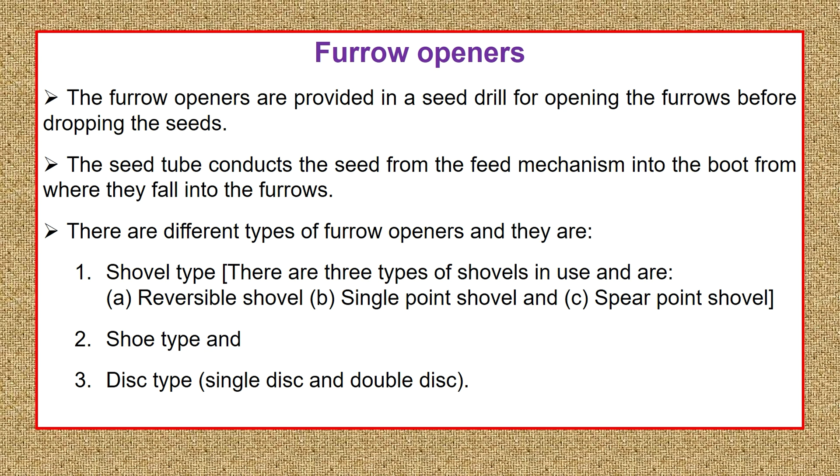This is how the shovel type furrow openers look. This type is best suited for land that is full of stones and root-infested from the previous crop. In such fields, shovel type furrow openers are recommended. These shovels are bolted into the tine or furrow opener shank at the lower point, so they can open the furrow to a desired depth and make the required width, into which the seed is dropped from the seed tube.

The one on the screen is equipped with reversible shovels. As I am marking it on the screen with the pen in red color, you can see the shovels placed on the shank or tine with the help of a nut and bolt mechanism. This one you are seeing here is the reversible shovel.

Why is it called a reversible shovel? It is also called a double point shovel because it has two working elements, two working points, sharp on both ends. We continue using it until one point becomes blunt due to wear and tear. Then we loosen the nut and bolt and reverse it, so the unused sharp point comes to the bottom and the blunt one goes to the top. This allows the shovel to be used for a long period until both sharp edges become blunt, which is why it is called the reversible shovel. In India, most seed drills are equipped with double point or reversible shovels.

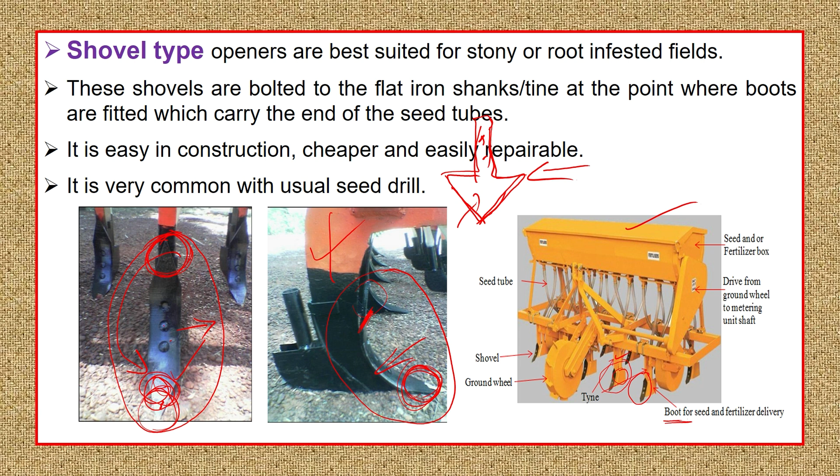Here you can see a regular seed cum fertilizer drill where the furrow shovels are attached into the shank or tine with the help of nut and bolt. The rear part of this component is called the boot, as written here. This boot is the part of the furrow opener where the seed pipe, carrying seed received from the seed metering mechanism, conveys it into the rear of the furrow opener. Where the pipe connects to the furrow opener is called the boot of the furrow opener.

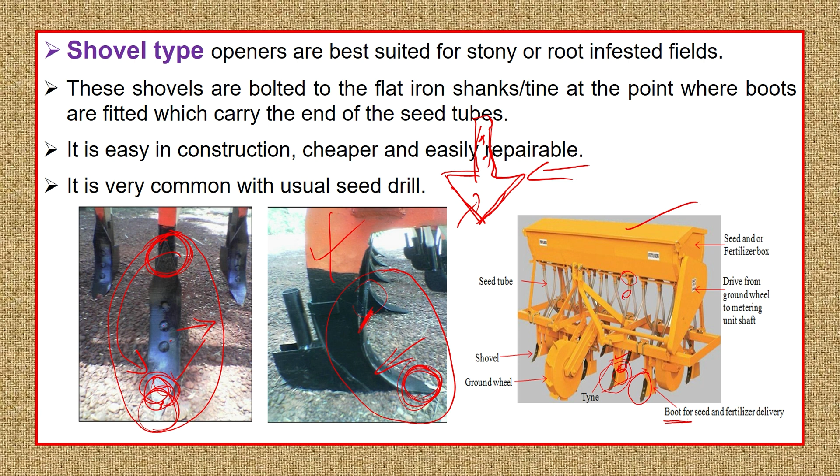That's how the shovel type furrow openers work. Similarly, another type of furrow opener is the shoe type furrow opener, which is used for soil that is full of trash and where the field is not prepared smoothly.

For fields which are not prepared smoothly, shoe type furrow openers are used. They are made using two flat pieces of steel or mild steel, joined at an angle by welding to form a cutting edge tool. With their help, we can open the furrow to a desired depth and width in soil that is full of trash and not properly prepared.

The field is not smooth; there may be crop residues and clods present. In such fields, shoe type furrow openers are recommended. It is especially suited for black cotton soil where the soil is hard and heavy, and for such fields, shoe type furrow openers are recommended.

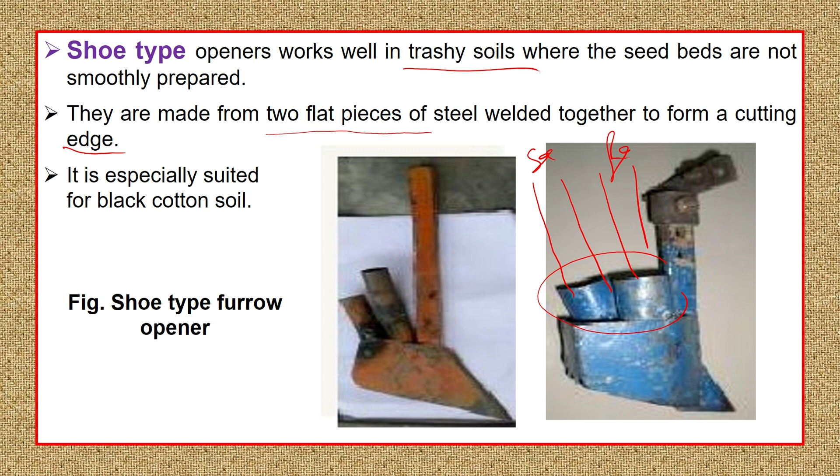Here also there are two pipes at the boot section, one for seed and another for fertilizer. They are connected with the pipe, carrying the seed or fertilizer by receiving it from the seed metering or fertilizer metering mechanism.

The next type of furrow opener is the disc type furrow opener. It's a special kind, not commonly used in the Indian scenario unless the soil requires it. There are two types under disc type: single disc type and double disc type. Out of all three, shovel type is most commonly used.

Disc type furrow openers are best suited for fields that consist of plant debris, trash and mulches that don't permit other tools to penetrate and make a furrow. In such fields, disc type furrow openers are attached to the seed drill to open the furrow where the seed will be dropped.

In case of single disc type furrow openers, this is how the seed drill is equipped with a single disc. They are set at an angle with both the horizontal and vertical so that they can cut the soil to a shallow depth and make a furrow. Into the furrow, seeds are dropped after being collected from the seed metering mechanism and carried through the seed tubes.

In case of double disc type furrow openers, each furrow opener has a set of two discs. They are set at an angle and cut the soil, throwing it opposite to each other, forming a small ridge between the two discs. Into that ridge, the seed will be sown.

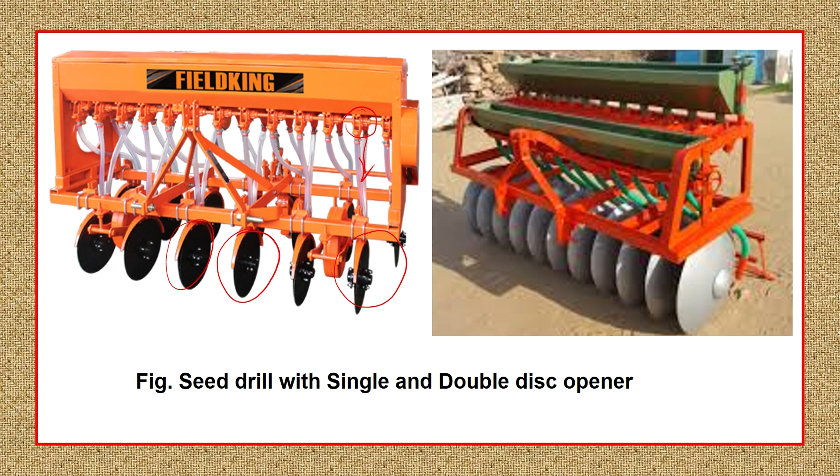As the seed is sown and the ridge is formed, the seed gets covered - that's one way of sowing. Otherwise, you can sow the seeds on a small ridge and later cover it with other seed covering devices.

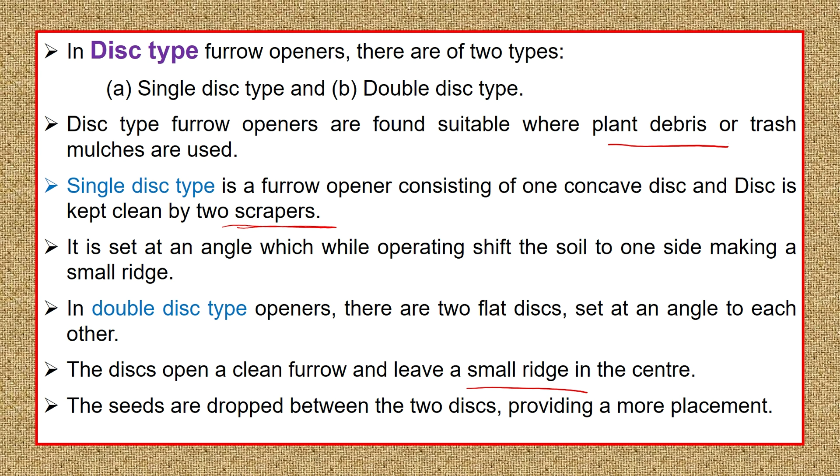In both cases, whether single disc or double disc type, the furrow openers must come with scrapers. Scrapers keep the disc clean by removing soil that tends to stick to the concave surface - similar to what was mentioned about disc harrows and disc plows, where scrapers are also required to keep the disc clean by removing soil sticking to the internal concave surface.

This is how the seed drill looks, showing all its main components. The first one is the seed box, which is always divided into two compartments lengthwise - the first half for seed and the other half for fertilizer.

At the bottom of the seed hopper or seed box, the metering mechanism is provided. It carries the seed at a controlled rate which is already set. According to that set rate, the metering mechanism meters the seed and drops it into the furrows through the seed tubes.

These seed tubes will receive the seed and carry it into the boot of the furrow opener, and from there the seeds will be dropped into the furrow, which is opened by the furrow openers.

It also comes with the ground wheel. This wheel is also called the drive wheel, sometimes called the transmission wheel. Alternatively, it is called ground wheel, drive wheel, or transmission wheel. The main function of that wheel is to provide the drive required for the metering shaft.

The shaft over which the metering units are mounted needs to be rotated because it requires a drive to meter the seed. So the drive is taken from the drive wheel, ground wheel, or transmission wheel.

As the drill is dragged or pulled forward, this wheel rotates. As it rotates, the linear motion is converted into rotary motion, and that rotary motion is transferred into the metering shaft. This is the metering shaft over which the seed metering rollers, spindles, or plates are mounted, and these rollers carry grooves.

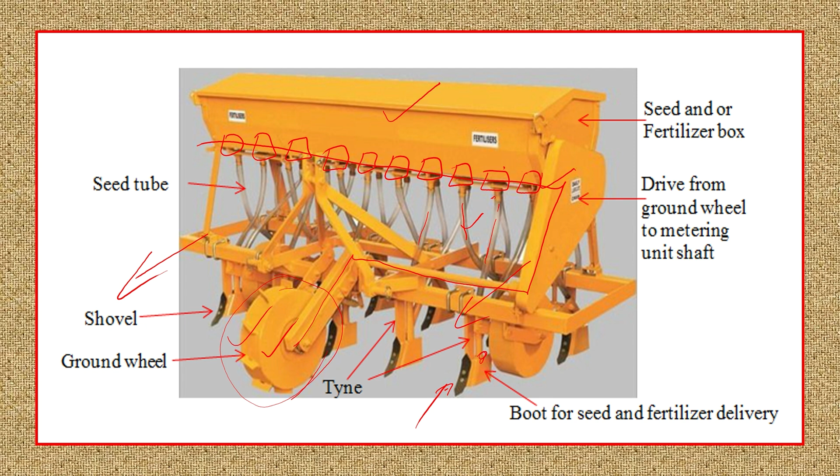That's all about the seed drill and seed cum fertilizer drill. We started with the seed drill and seed cum fertilizer drill and their components. The main part of the seed drill is the metering mechanism, and there are different types of metering mechanisms. They require motion, and this motion is taken from the ground wheel, transmission wheel, or drive wheel. As it rotates, the metering mechanism will carry seeds either on its grooves or on cells provided on the rotating plate.

Now we are moving to another method of sowing, that is planting. By now you must be aware of the difference between planting and seeding or drilling, as we discussed while talking about different sowing methods. Planting is a method of sowing where certain kinds of seeds require plant-to-plant spacing, and that is ensured here.

In case of a seed drill, we sow the seeds in a continuous flow-like manner without maintaining spacing between seed to seed or plant to plant. We only maintain row-to-row spacing in a seed drill or seed cum fertilizer drill. Whereas in planting, we also ensure definite spacing between plant to plant or seed to seed. So any method where plant-to-plant spacing is maintained in addition to row-to-row spacing is called planting.

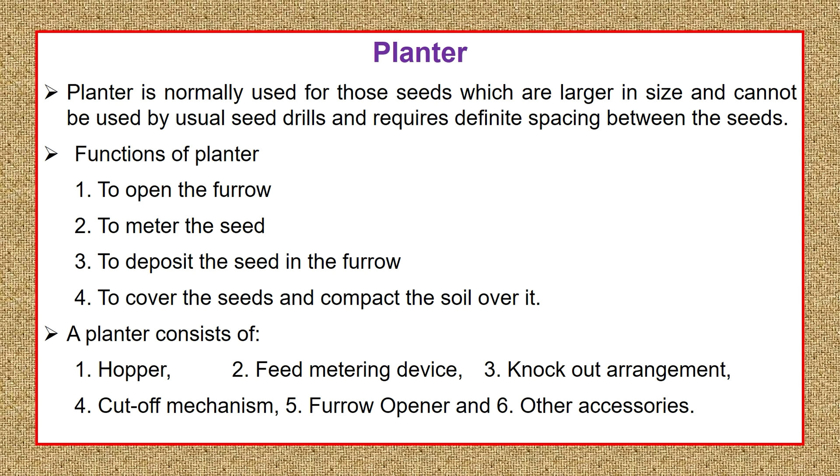So here the other accessories include gauge wheel to maintain the depth of furrow opening, or seed covering devices to cover the seed once it is sown in the furrow, and some other transport wheel to carry the implement whenever that implement is off the field. There might be some accessories which you can use because they are need based, not mandatory components that come along with the planter.

So this is how the planter will look like. Most of the cases, the planter will have individual seed box for each furrow opener. So each furrow opener has its own seed box and seed metering mechanism, and sometimes they also have separate drive wheel or ground wheel from where the drive required for the seed metering mechanism is obtained. And sometimes they also have separate fertilizer box for each furrow, or a common fertilizer box for each furrow. So in these two pictures, you can see both examples.

So in the first one, there are individually mounted furrow seed boxes where the seeds are placed, and the number of boxes are equal to the number of furrow openers. Similarly, there will be seed box fertilizer boxes also, or if it is only a seed planter, there will be no fertilizer box and only seed will be sown at the time of sowing. Whereas in the next picture, as you can see, there are around 6 seed boxes for 6 furrow openers, and there is one common fertilizer box where the fertilizers are filled.

So at the time of sowing, the fertilizers and seeds both are metered and they will be dropped into the opened furrow, and later they will be closed, either by soil covering devices which come with the seed drill as an integral part, or it will be a planking operation done separately after the seeding is done.

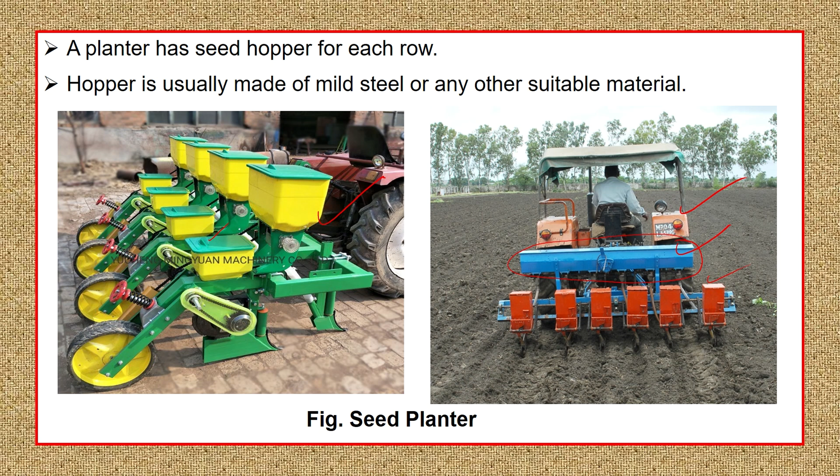So keeping that in view, it is recommended to sow the seed 25 mm shallower than the fertilizer, and 25 mm apart beside the fertilizer. In the sense, the fertilizer will be placed 25 mm below the seed, and 25 mm beside the seed. That's how the seed will be kept not in contact with the fertilizer as it is sown in the field. In such cases, it is observed there is maximum germination, compared to seed which is sown where the seed comes in contact with the fertilizer.

So as far as seed metering devices are concerned for the planter, the one which we use in the seed drill is not suitable for it, because in the seed drill, the most commonly used metering mechanisms are fluted feed roller metering mechanism, internal double run type metering mechanism, cup feed metering mechanism, auger feed metering mechanisms, which we discussed in one of the previous lectures.

So they all carry the seeds in a continuous manner. They never maintain plant to plant spacing. Therefore, they are not at all used on planters. In planters, such kinds of metering mechanisms are used where it is able to maintain plant to plant spacing as well, in addition to maintaining row to row spacing.

The most common type of device used as a metering mechanism in planters is the rotating plate type. It is placed at the bottom of the seed hopper, and that rotating plate carries cells on its periphery, either notches or pockets. Each cell carries a seed from the hopper and delivers it to the delivery spot, where a seed pipe receives it and conveys it down. Some planters also have vertical or inclined rotors, but the horizontal plate seed metering mechanism is quite common.

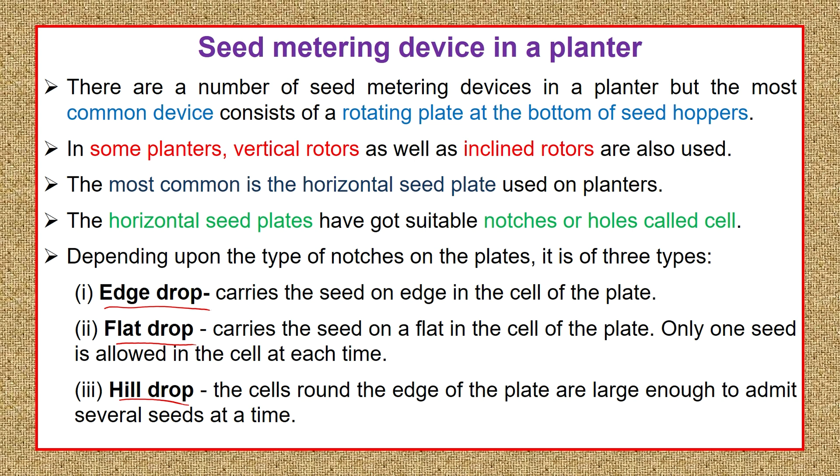There is another type called hill drop. It is similar to the edge drop, but the size of the notches is bigger, with a large opening or large cells. This is intentionally provided because each cell can accommodate more than one seed. Several seeds are carried each time, and they are all dropped together, so in every hill more than one seedling may emerge as the seeds germinate.

Recall that while discussing different methods of sowing, we also discussed hill dropping or hill drill. Hill drop drill is sowing seeds in hills, where each hill contains more than one seed. For such sowing operations, the hill drop metering mechanism is used, and that method is called hill drop planting, where hill-to-hill spacing is maintained in addition to row-to-row spacing, and more than one seed is sown in each hill.

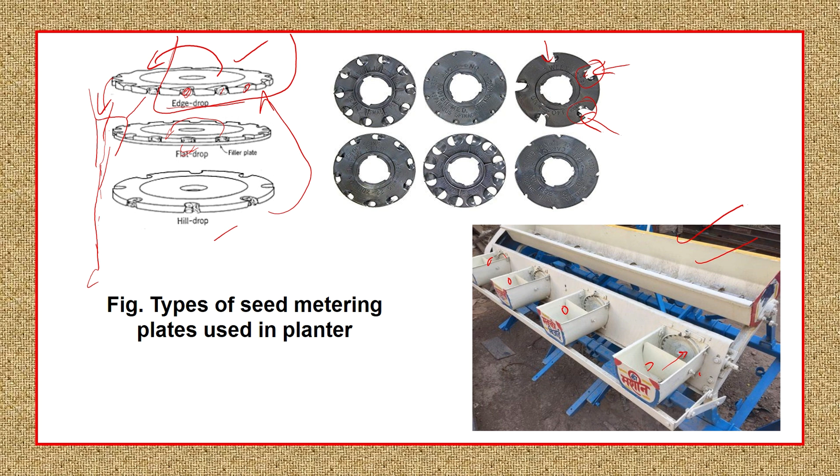This is the planter where seeds are placed, with the seed drill having an inclined surface. Here you can see the seed planter, where the first box is for fertilizer, carrying it down to a metering mechanism at the bottom. Similarly, there are four seed boxes where seeds are placed, with an opening at the bottom. From there the seeds approach an inclined rotating plate that has teeth or notches on its periphery. These notches carry the seeds and drop them into the seed tubes, where the seeds are conveyed, and that's how metering takes place in a planter.

There is a mechanism called cutoff mechanism and knockout mechanism in case of planter. In seed drill you can only see the cutoff mechanism, whereas in the planter there is another component called knockout mechanism as well.

Cutoff mechanism takes care of multiple seed carrying. Whenever the seed notches carry more than one seed, since these cells or notches are meant for carrying a single seed, but due to some reason like improper size of the seed, they may carry multiple seeds. That is not desired for planting operation, so the cutoff mechanism takes care of this by removing the excessive seed being carried in that notch.

Knockout mechanism is used to drop the seed at the point where it is supposed to drop. Sometimes if any seeds get stuck in the notches, they will not get discharged at the point where supposed. So they keep circulating and will not carry new seed since that seed is already stuck in the notch. This causes missing seeds in the furrow, disturbing the uniform sowing of seed. To prevent this, the knockout mechanism is provided.

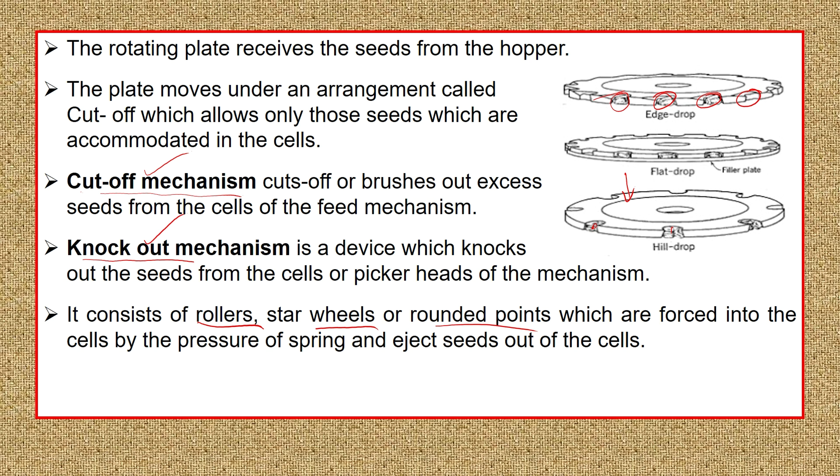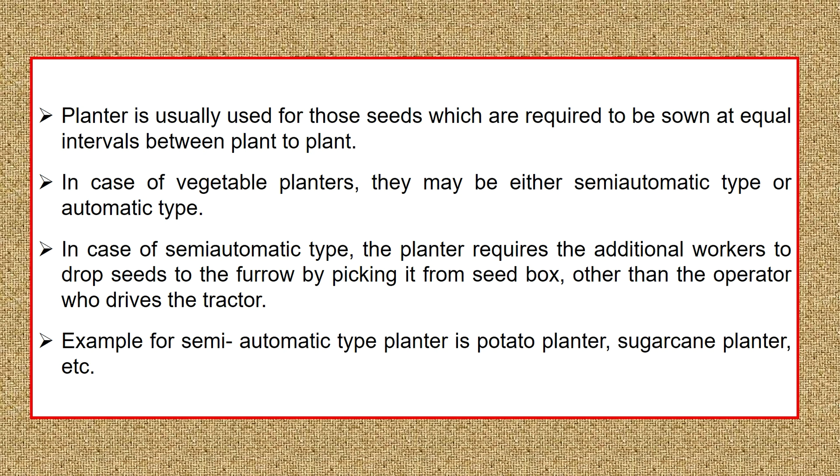In case of vegetable planter, the metering mechanism may be semi-automatic type or automatic type. Whenever a planter is semi-automatic, it requires more human interference for metering purpose. One person will be engaged driving the tractor, where this implement is attached. Another one or two persons will sit on the implement.

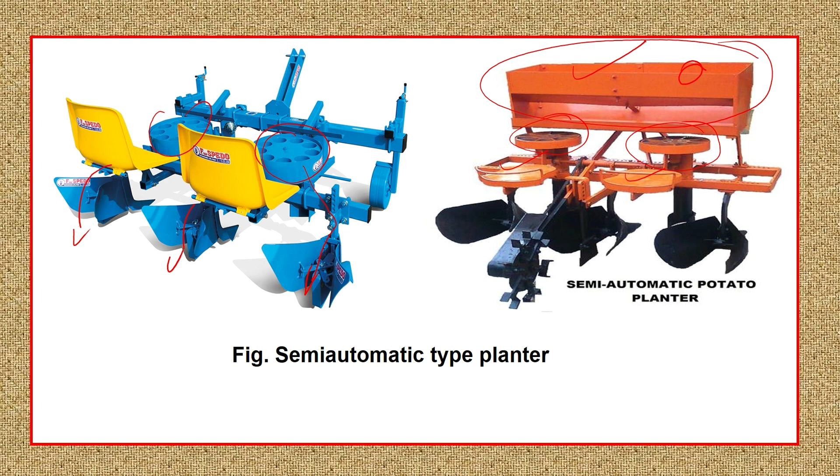There is a seed hopper or seed box where seeds are filled, with a metering mechanism close to it, and sitting arrangements for farm laborers who take seed from the hopper and place them into a rotating disc. This disc has pockets on its surface where seeds are placed, carried, and deposited into the opened furrow. This arrangement is called a semi-automatic planter, and such planters are generally equipped with ridges, called ridge planters.

In case of automatic planter, there is no manual intervention; the metering mechanism itself picks the seed from the seed box and deposits it at the delivery spot, where the seed is placed either into the furrow or onto the bed. If placed on the bed, it is called a bed planter. If placed on the furrow, it is called a furrow planter. In both cases, the device may be used.

If the furrow opener is the ridge former, it will form the ridge, and the seed will be dropped into the ridge, with seed metering done automatically with the help of a picker wheel mechanism or picker arm type mechanism.

The picker wheel mechanism is arranged so it can pick the seed from the seed hopper and place it into the delivery spout, or it may use a continuously rotating belt mechanism with pegs that carry the seed, picking it up from the hopper and dropping it as it approaches the delivery spout, where the discharged seed falls by gravity into the bed where it is supposed to be planted.

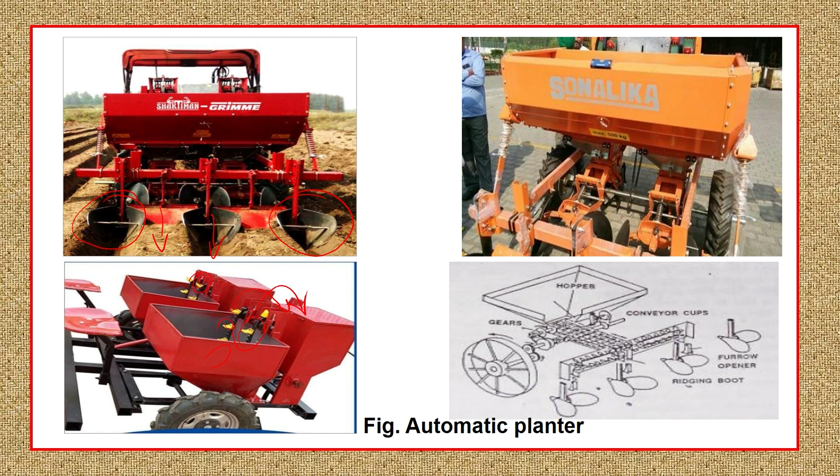That's how the planting operations are explained. You can use these references for further reading regarding sowing, seeding, drilling, planting, and different types of metering mechanisms.